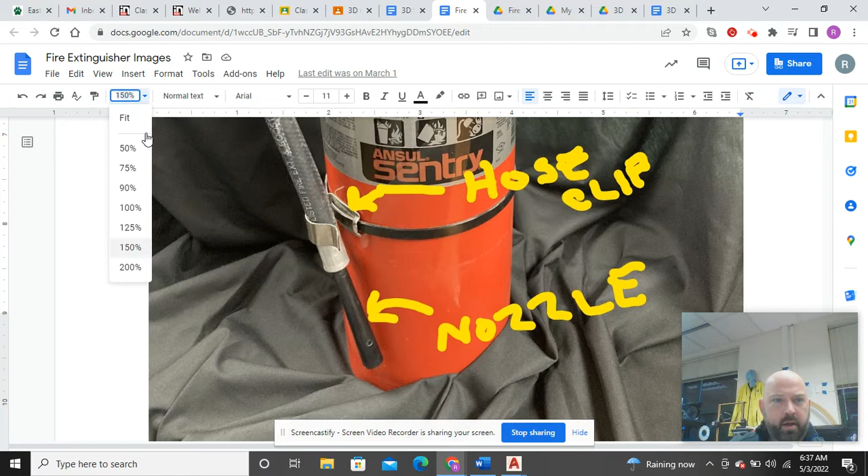If you look again down here, the sides on the very end, on the wide end, are flattened, and I believe that's for like a paint sprayer. Depending on the position of the tip, it shows you the way the material will fan out. I think this is supposed to be a visual indicator of whether the material is fanning out flat, side to side, or vertically.

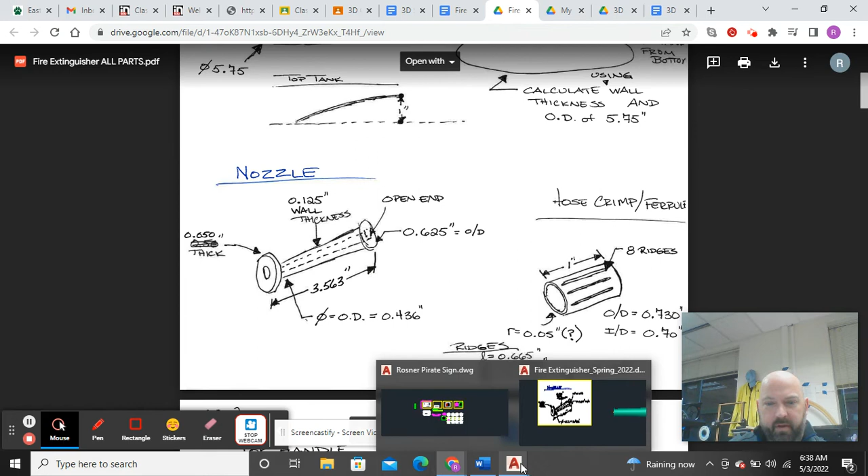So I neglected to put a dimension on that for how wide that is. But the easy thing I went to look at and find -- and for my students, it's completely fine if they want to just kind of do it helter skelter.

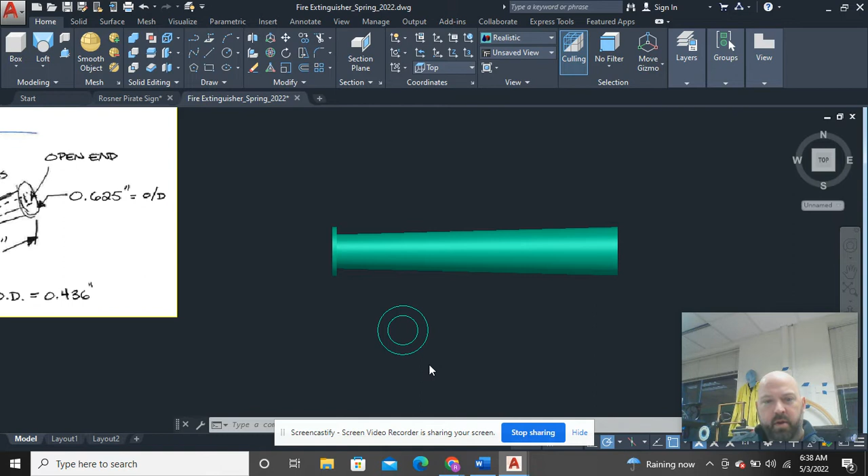However, if we remember that the diameter of this is 0.625 and there was an eighth of an inch offset, 0.125, going to the inside -- the flat portion, this is wrong -- the flat portion is a line that's half the thickness, kind of like I've got it drawn right here, of the wall thickness of the plastic.

So one way to do that is if we were to take a circle, a basic circle, and say okay, I want to offset this half of an eighth of an inch, which is 0.0625, that's a 16th of an inch.

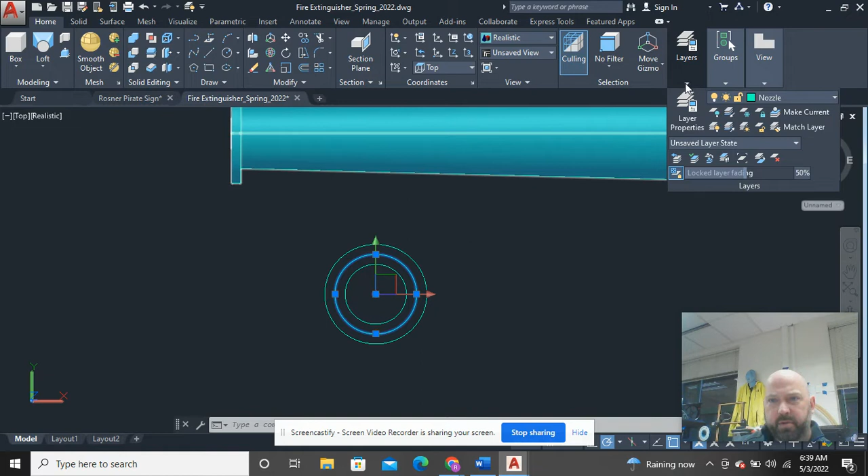This circle now is going to be placed on the end of the fire extinguisher, and it will be a place that I can line up and attach my slicing planes to.

So what I'm going to do is make a couple of knife edges, basically. I'm going to make a big rectangle -- just like if you're cutting through a watermelon, you want to make sure the knife is big enough, ideally, to slice through it in one pass.

I don't know when I cut through this way how far back it's going to cut in, so I'm just going to make it plenty big and try it out. If this was a pretend knife edge, it's definitely big enough to slice through this in one shot this way.

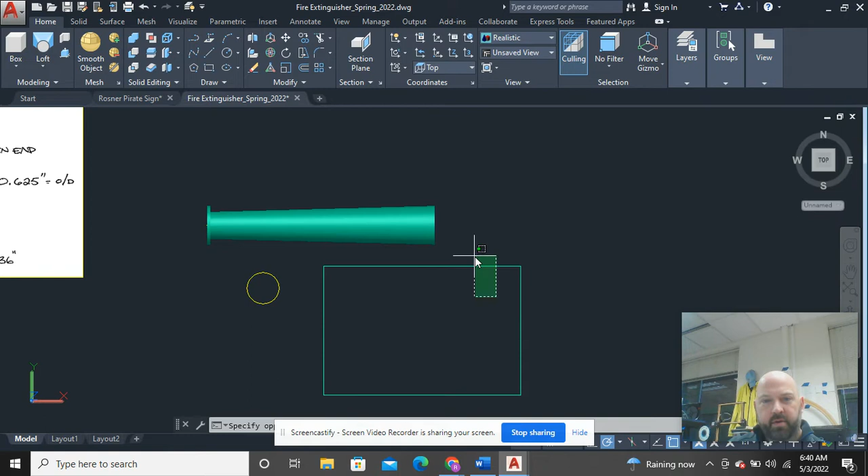So I can go ahead and put this on my construction layer. I'm going to have to draw a line through here to arrange it, and I'm going to need a copy of this when I'm all said and done.

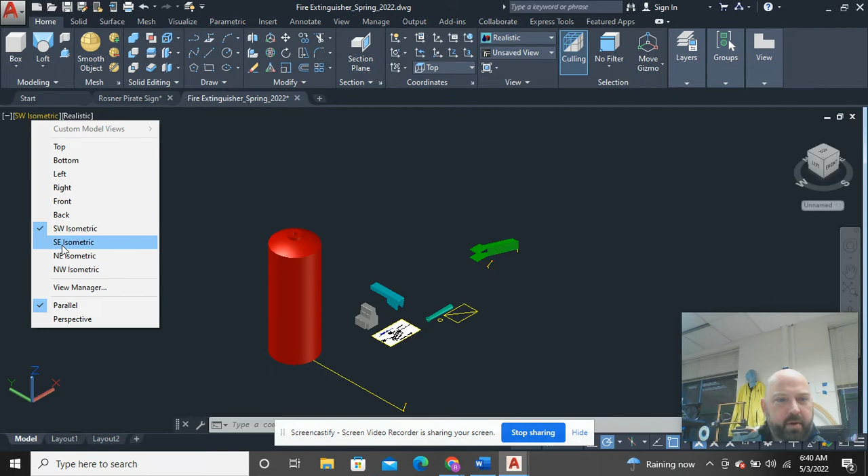Next, I'm going to go up to a southwest isometric -- actually, a southeast isometric is probably a better way to go, because I want to be able to see the front of this fire extinguisher right here.

So first I'm going to go ahead and do a couple of 3D rotates, get this one in place this way, and I can go ahead and place this right away. This might be easier to see in wireframe. I'm going to place this circle, which is just for alignment, right here on the end.

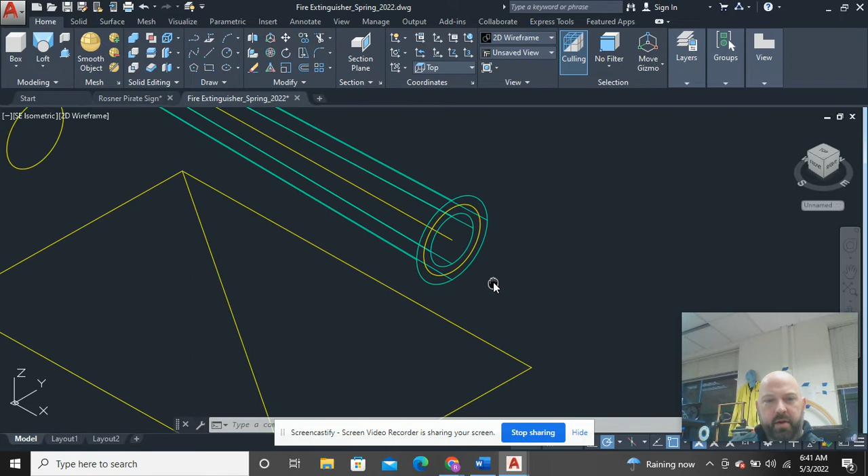So in a minute, I'm going to line this knife edge up. I'm going to rotate it and line it up with the quadrant of the circle right here, say like the 9 o'clock and 3 o'clock quadrants. Now I'm going to rotate what we're considering the knife edge up 90 degrees.

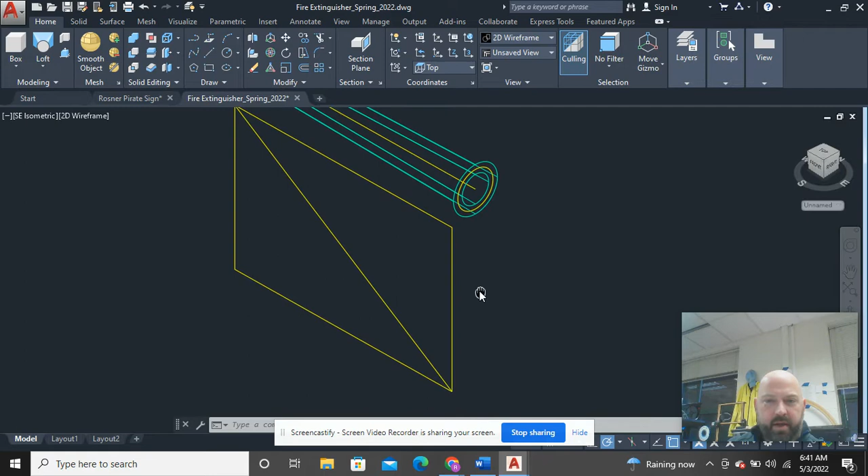Now I'm ready to slice this thing long ways, and all I have to do is copy, place it at that midpoint, and place it at -- I don't know why it's not picking up the quadrant, but it should be.

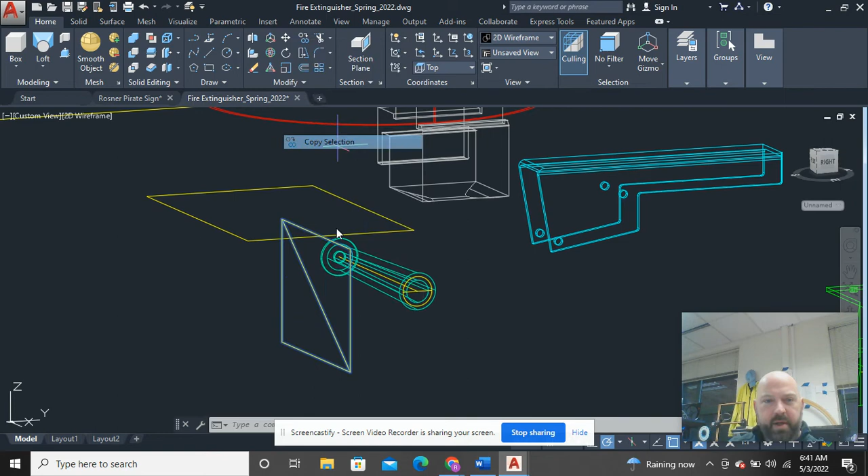You should be able to find a quadrant here and there, and that's where I want to place it. So I'll grab this, copy it, place it here, place it at that point, and place it at that point.

So now if I go back to a realistic view, you should be able to see that my knife edge is ready. It's kind of already semi-slicing through here.

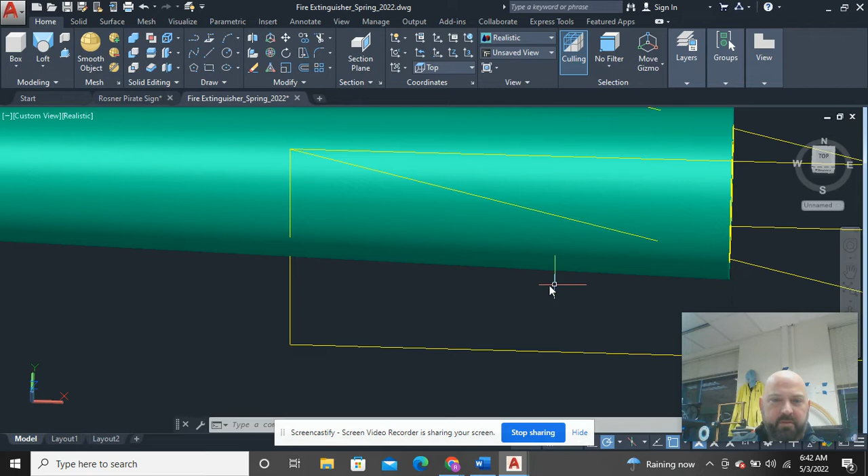But here's what I was saying about the sizing. We didn't know. It would have been a really tough calculation to figure out how far this went back to where the slicing was done.

So I said, my thing was make it plenty big, but what I'll say is just move it back, just keep nudging it back until you get it to the point where the knife edge is coming out free and clear. It's not buried in the object at all. There's got to be a little gap there.

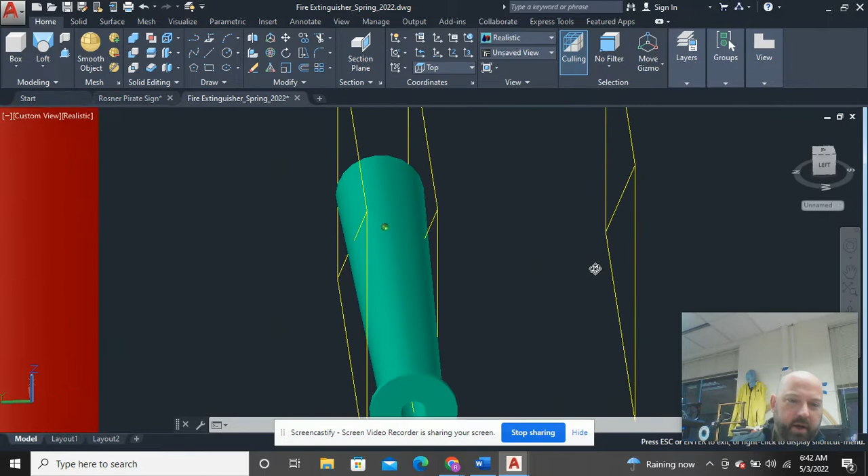Okay, don't need this anymore. And what I'm going to do now is use my slice tool. Slice is up here to the right of subtract. So I click slice. It asks me what I want to slice down in the command window. Select object to slice.

So I select that object, and then I right click, and it gives me some options of what I want to use to slice it. 3 points means I could just pick a point, pick a point, pick a point, and that 3 points creates a plane. Or since this is a joined rectangle, I can just click planar object, and I click my rectangle.

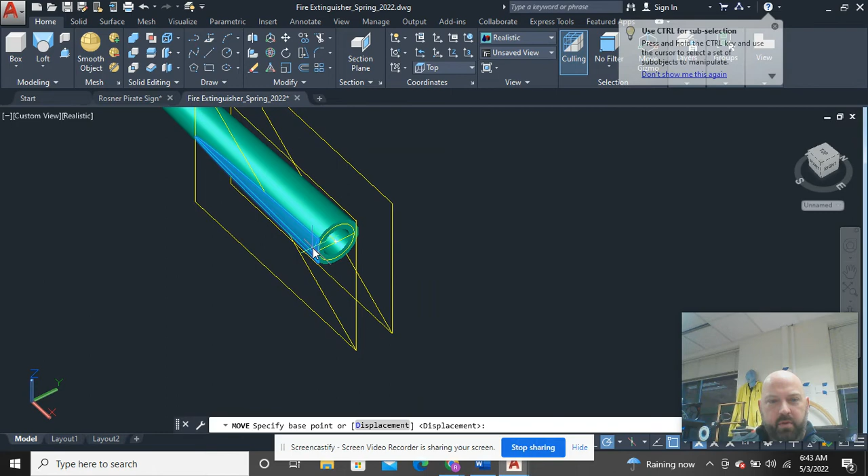And then the last question it asks me in the command window is, what do I want to do next? And I say I want to keep both sides. The reason I always click keep both sides is because I can never remember how it determines which side is the keeper and which side is trash. So you can see here, when I'm done, it pulled that apart.

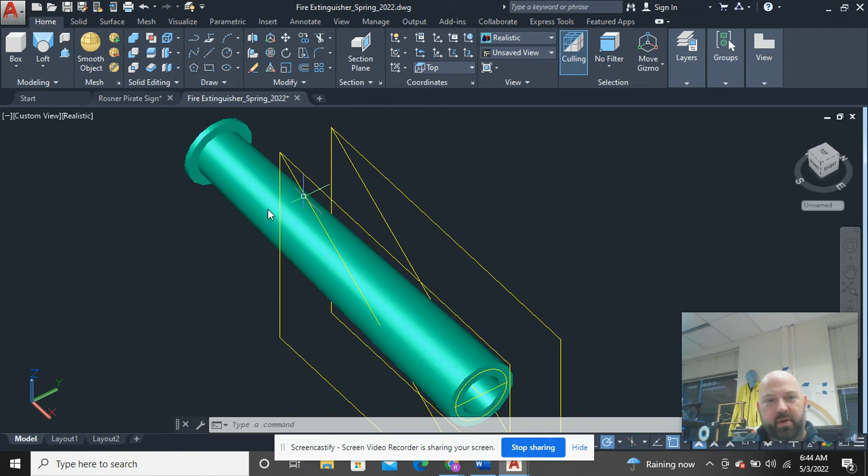And I did a little bit of something wrong. My slicing plane maybe was a little bit too far back. It's almost like it was re-slicing further back into it. I could have nudged these down just a tick further, possibly. Oh, I see what it's doing. It was also slicing this part of the flange, and that's because this was in alignment with this.

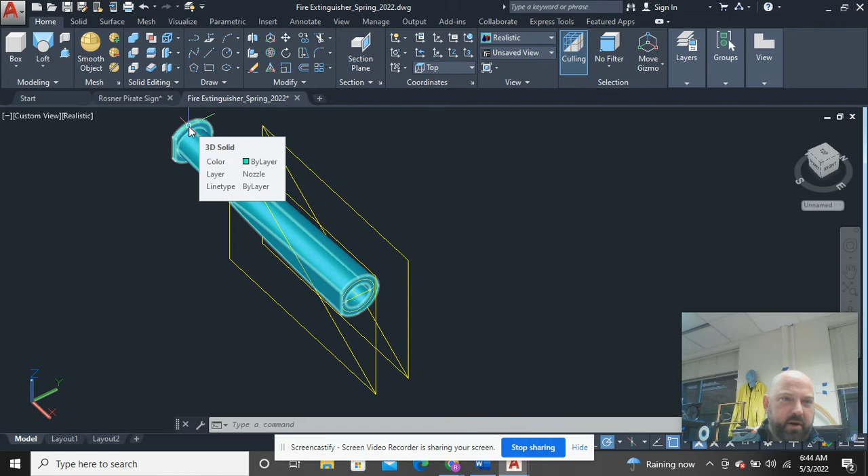So I neglected to say that that also kind of comes with it. But I'm just fine with that. This is actually true to life, realistic of how the thing looks. So the workaround for that would have been to explode or separate the nozzle and the flange down here. And then I could have sliced it right here. But to me, that's not a big deal because it actually is a little more realistic that way.

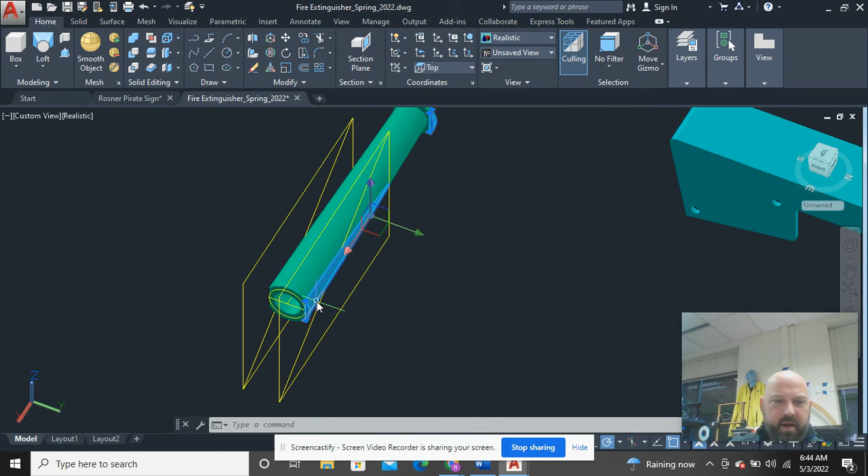So I slice, pick what I want to slice, right click, pick a planar object down here from the command window. There's my planar object. Okay, what do I want to do? Keep both sides, then find what needs deleted, hit delete. Now I can erase all this garbage right here.

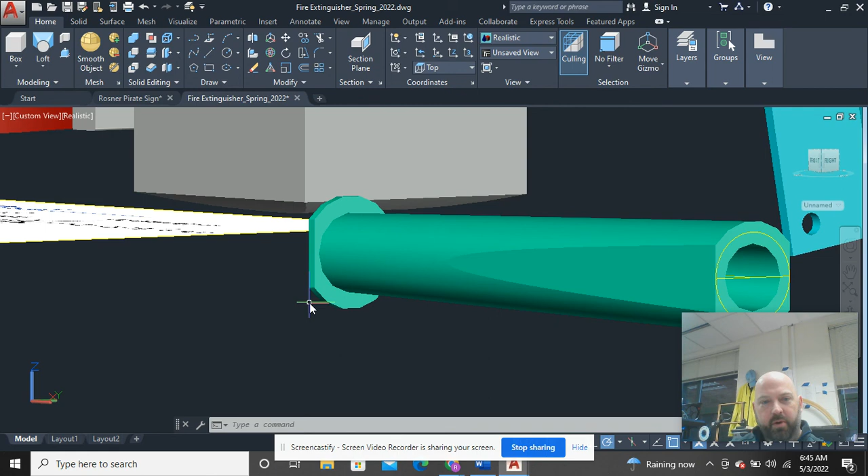And my nozzle, you can see I'm left with a 1/16 of an inch of thickness. And the reason actually that this is more realistic is because they probably put like a wrench on the end of this to twist it into the fitting on the end of the hose. And so it needs a flat spot on the end. And like I said, I don't have a very good picture, but that is very realistic compared to what the drawing looks like. So nozzle done, and moving on to probably the hose next.